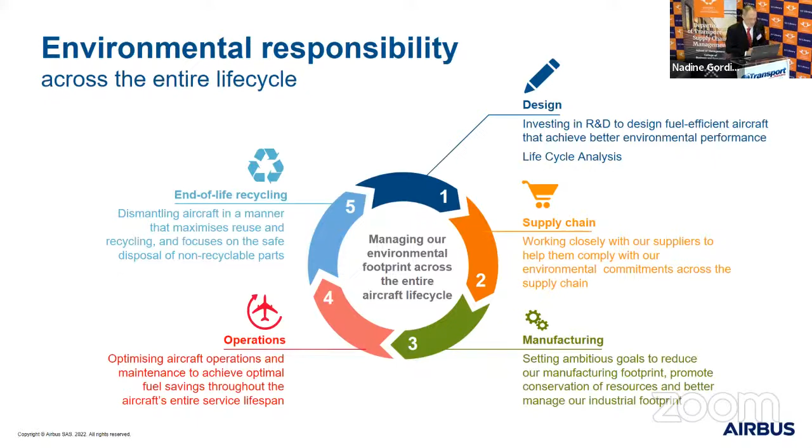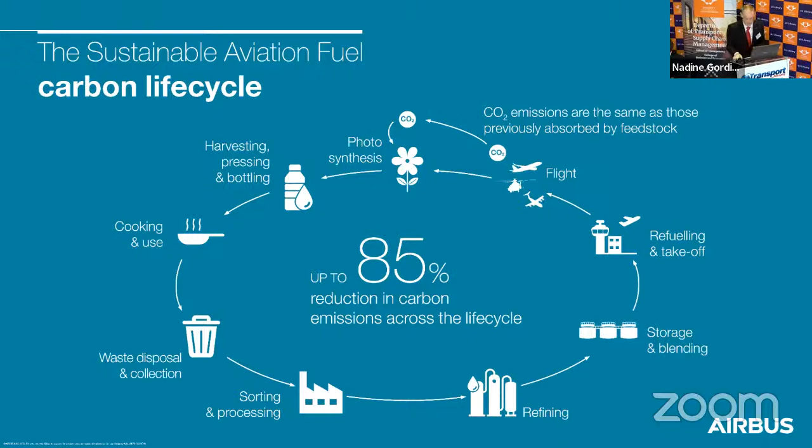There are some major challenges, however, to sustainable aviation fuel. That is essentially the availability - production is very small, much smaller than what the global fleet requires. The cost is currently very high. Of course, those two issues are linked: low production rates, low purchase rates, high costs. And the distribution is very poor - it's available only in a relatively small number of airports around the world.

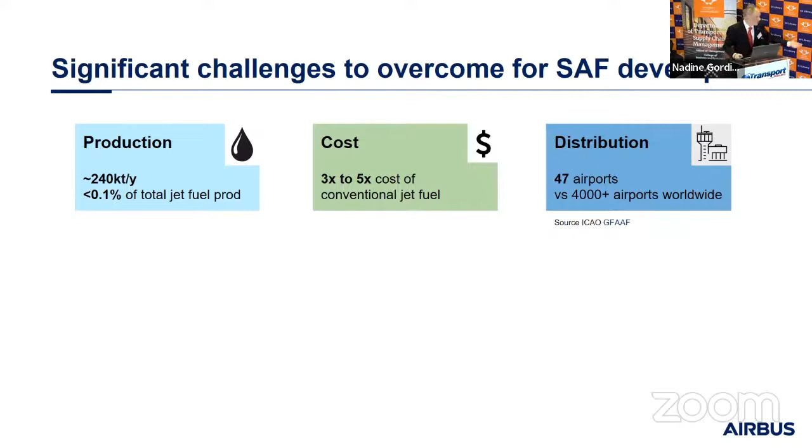So some airlines that are beginning to use sustainable aviation fuel in their operations are actually taking as much as they can from one location, but using none elsewhere in their network, because they might have a target to use 1% sustainable aviation fuel. How can you do that? You uplift sustainable aviation fuel at one part of your network. And a lot needs to be done.

So between now and 2050 - a long time, but $1 to $1.5 trillion will need to be invested in the production of sustainable aviation fuel. Companies that already produce fuels are best placed to do that, but it requires different, specific infrastructure. And policies as well - policies need to be put in place to facilitate this. And that is progressing very fast. There's some good news here as well.

The good news is there's a lot of collaboration with, for example, the Clean Skies for Tomorrow organization, which is a collaboration of engine manufacturers, fuel providers, and airlines working together to develop means of overcoming the hurdles. For example, they produce a very interesting policy toolkit, which you can find online.

Which governments around the world can take on board in support of promoting the scale-up of sustainable aviation fuel production. Many airlines have made announcements. This is just one example: airline alliances committing to having 10% of their fuel burn being sustainable aviation fuel by 2030. It's an ambitious objective, but it's one which the industry is coalescing around.

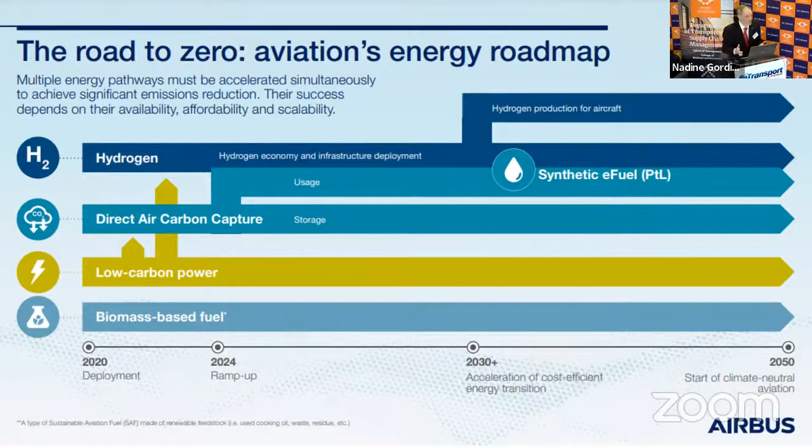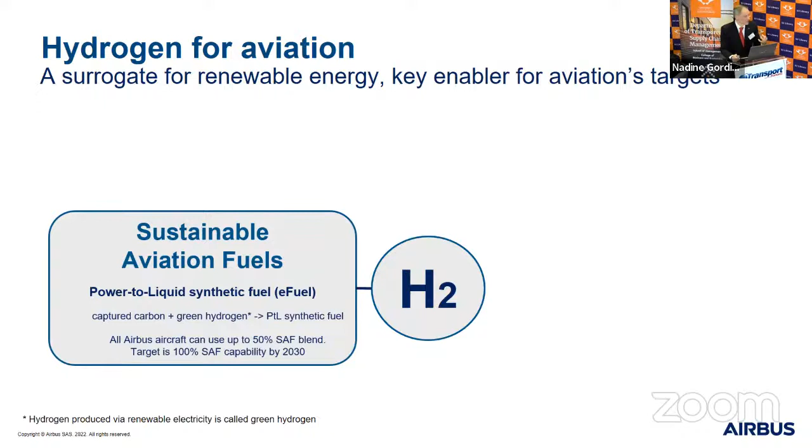To do that, you also need hydrogen as an ingredient, but hydrogen can also be used directly as a fuel, potentially on some new aircraft types, which I'll show you briefly now. As a quick reminder, hydrogen can actually contribute to aircraft propulsion in three ways: through being an ingredient in sustainable aviation fuels, so synthetic kerosene in combination with carbon; by generating electricity through hydrogen fuel cells; and also through simply burning it as we do kerosene.

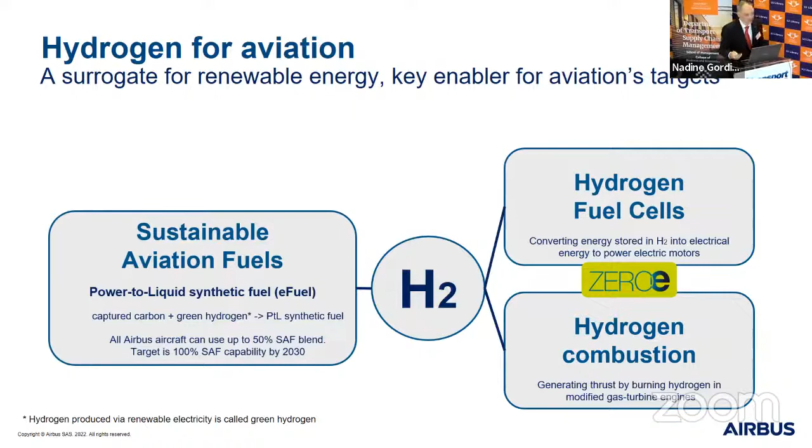So you can burn hydrogen in a gas turbine. The ideal gas turbine would be optimized somewhat differently, but it's not breakthrough technology that's required to burn hydrogen in gas turbines. On the right-hand side of the chart, those two means of using hydrogen are both envisaged for our ZEROe concept aircraft, which are zero-emission aircraft we envisage bringing into service by 2035. It's still quite some way away, but there's a lot of technology that needs to be developed between now and then, along with a hydrogen ecosystem. That's what we're beginning to work on.

So these are concept aircraft. The aircraft we actually launch later in this decade won't be exactly any of these three, but it could look like one of them. You'll notice, compared with our current aircraft that Joep will tell you about, the range capability is relatively small. That's because of the specifics of hydrogen - it's a fuel with good energy density from a weight point of view, so it's very light, but it takes up a lot of volume. So actually carrying that amount of fuel is more of a challenge and would require very specific aircraft design.

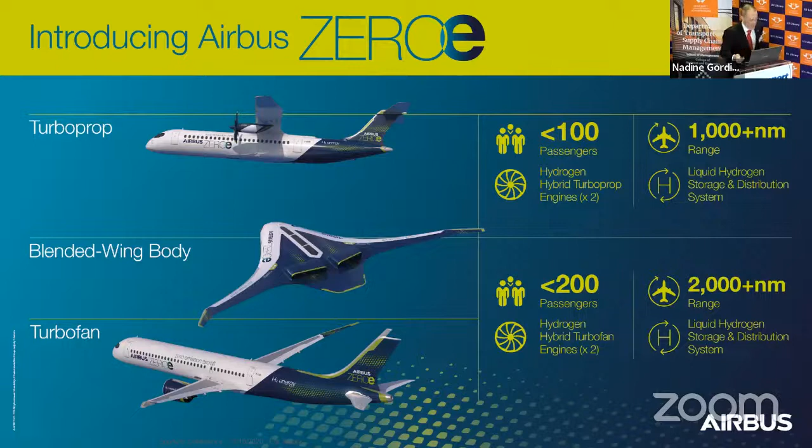Just to give you an idea of some steps along the way, in 2026 we will fly an A380. The A380 is not going to be powered by hydrogen - it has its 4 kerosene-powered engines - but you can see that we're going to mount a smaller hydrogen engine up high on the fuselage to test hydrogen combustion in flight.

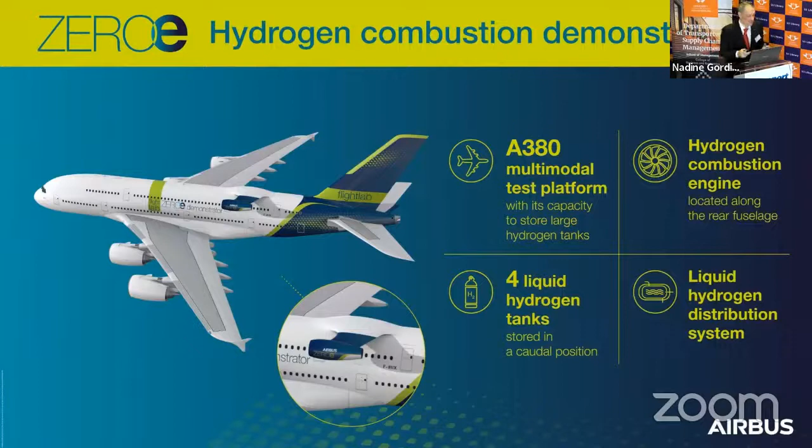And we're not just testing the hydrogen combustion, we're testing the fuel system, because we're going to use liquid hydrogen, which is cryogenic, stored at -253 degrees. The fuel system is therefore cryogenic, so it's a completely new fuel system for us to develop. That's part of the reason why we're going to be needing to fly such test aircraft.

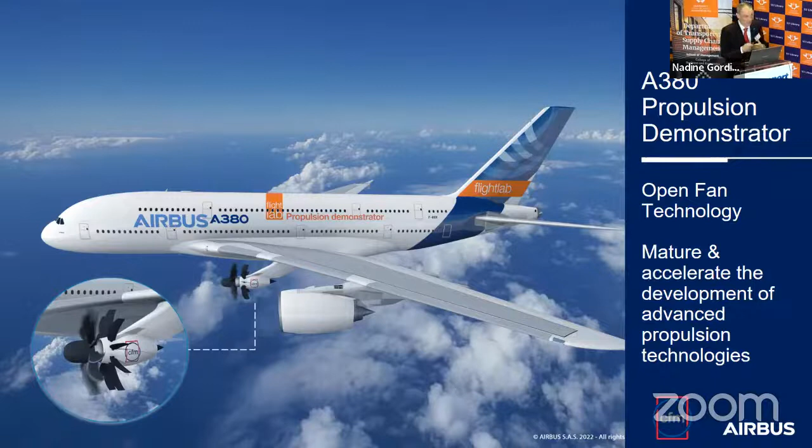We're not exclusively working on hydrogen. We will also use an A380 to test radical new engine technologies, such as this open fan technology, around the same time frame, also for new aircraft configurations that would be powered by kerosene.

We're also testing aerodynamics. I tend to think that aerodynamics has been studied so hard and for so long that we must have done everything there is to do and found the perfect solution, but apparently we haven't. I think this aircraft is going to be constructed in 2023 - it's actually a modified Cessna Citation with completely new wings - and it will fly, I think, in 2024 to test very radical aerodynamics.

And we're developing our industrial capabilities as well, because there's no point having radical new concepts if the industrial system is not capable of delivering them. Essentially, we don't want the industrial system to be a constraint on anything we would like to do with a new wing. And if we think about the hydrogen aircraft, the wings will no longer be storing the fuel as they do today - that would need to be stored in tanks elsewhere. So that gives a whole new range of opportunities that we might want to make sure we are able to realize.

And this is a kind of fun and immediate thing that we're working on. As for this year, this should actually start happening. This aircraft is already flying - it's a glider, a rather unusual one because it has a turbojet mounted on the back. We've actually taken a couple of these gliders and we're going to test hydrogen in this turbine. We're actually going to fly 2 aircraft - one will burn kerosene and one will burn hydrogen.

We'll fly them together. We'll have a chaser aircraft monitoring the exhaust from those aircraft and the properties of those exhaust plumes, which is very important for understanding the benefits that hydrogen could bring with regard to the non-CO2 effects of aviation. That's something I haven't addressed today, but CO2 is the principal effect that we understand, but there are other effects in terms of climate change that aviation has, which we globally call non-CO2.

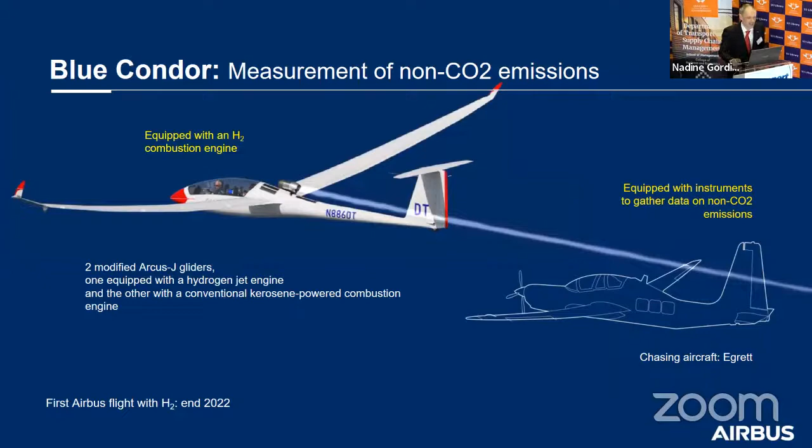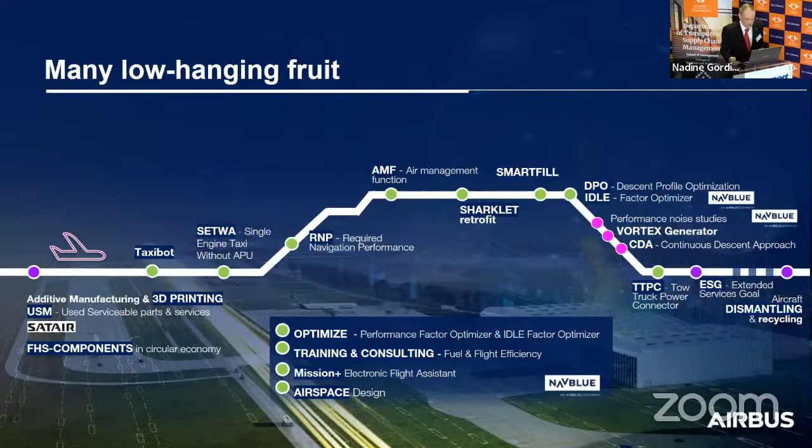So finally, and I'm almost done before handing over to you, operations and infrastructures - there's a lot we can do. This chart is very busy, so I will simply say, in every stage of the flight, and this chart is representing a typical flight, there are things that we can do to improve the sustainability, whether it's noise, waste, or carbon dioxide and greenhouse gases. We can still find some more percent, 5-10% maybe, if we combine all of these things together.

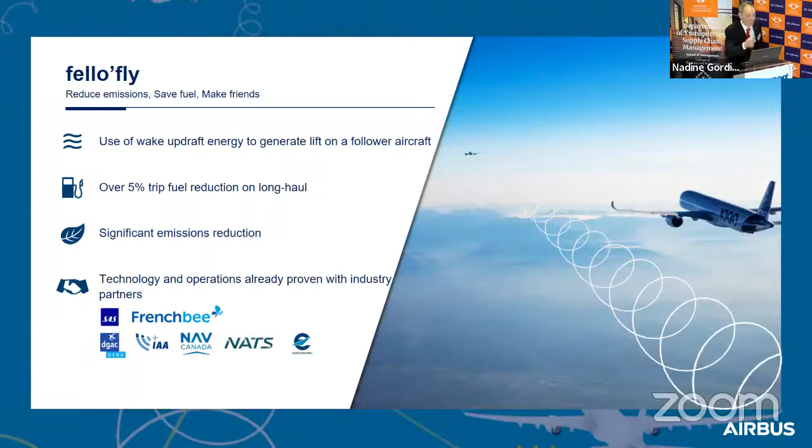Fello'fly - we can fly aircraft one after the other. You've probably seen geese flying - they fly one after the other, and the goose which is in front is doing all of the work, and the goose which is flying just behind and to the side is only doing 75% or something like that, because he's benefiting from the turbulence of the goose in front. We can do the same thing with aircraft. It's a challenge in terms of air traffic control, but it's something we're working on. And again, we can gain some more percent here in terms of our emissions.

And finally, carbon capture. This isn't directly associated with airline operations, but it's a nascent technology capturing carbon dioxide from the air. Airbus has begun to invest in this because for that last segment in that net zero roadmap, that lowest segment, to the extent that we're going to need to rely on offset and carbon removals, we would prefer to do carbon removals than offset. And carbon removals is something that the aviation industry can invest in, and we're beginning to invest in it. We hope we can then demonstrate to regulators that that's something that can genuinely make a contribution and can be recognised by regulators as part of the path to net zero.

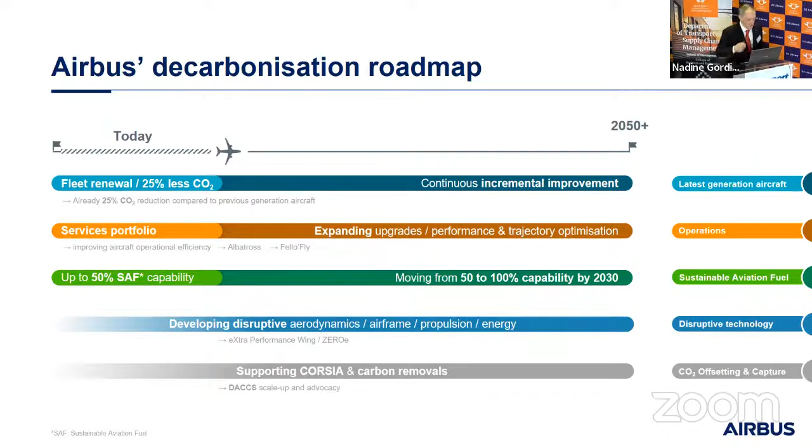Here's a summary chart, which I won't detail because it summarizes what I've said with regard to the top level means that we can address those 5 domains to reach net zero, but we'll leave that with you.

When it comes to talking proactively about what we're doing on sustainability, which is also important, like we're doing today, we have to be very accurate about it and give the right context. If not, we will be accused of greenwashing, and that is counterproductive. So I hope you will have the impression that in presenting what we do today, we're also being transparent about sustainability, acknowledging the impact, as well as trying to tell you about what we're doing to address it.

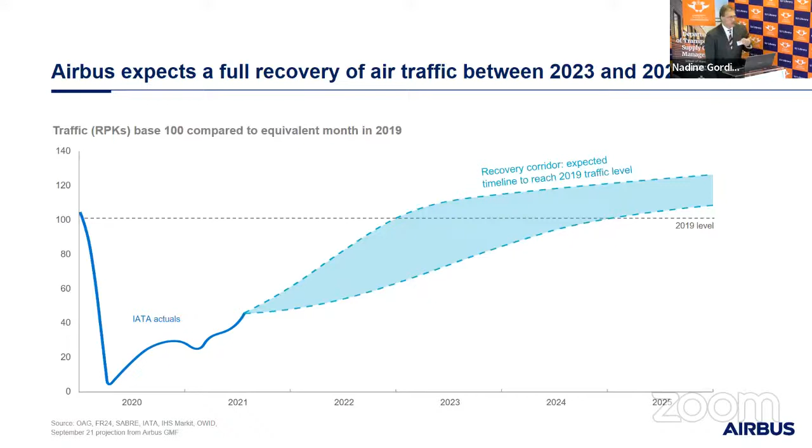We do what we call a global market forecast, an economic forecast that looks 20 years out into the future to analyze what we think will happen to traffic and traffic growth, and then to tell us, especially Jérôme, how many aircraft we'd be expected to sell over the next 20 years. What we see is that within Africa, traffic will grow by 4.6% every year for the next 20 years. Domestic is 4.6, and within the continent, 4.7. Towards Asia Pacific, it's growing even more, 5.4%. But you get the picture: for us, all in all, there's going to be a lot of growth.

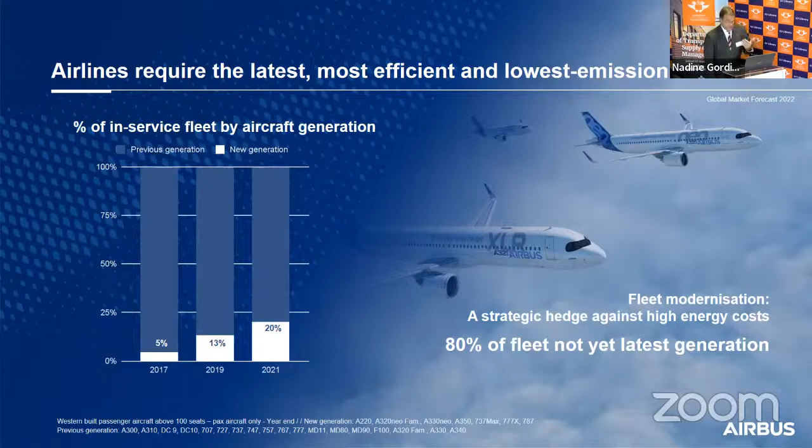The latest generation aircraft - this is the Airbus latest fourth generation aircraft family. We have the 220, the 320, the 330, and the 350 families. All of these, compared to the previous generation, burn 20 to 25% less fuel. Burning less fuel means less emissions, so for us that is the quick win solution: putting the latest possible aircraft into the market.

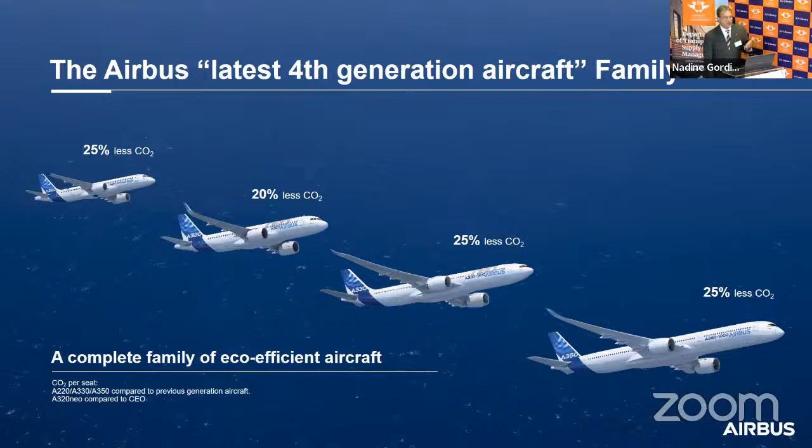So very quickly, the 220 is a brand new aircraft, a clean sheet design. It has all the latest advancements, and I disagree when Corin said we don't know what we can still do with aerodynamics. We're still improving aerodynamics because the computing power we have nowadays allows us to do calculations that wouldn't have been possible 10 years ago. A lot of the aerodynamics is just computer-generated calculations that allow us to totally optimize the aircraft.

We have advanced materials, the latest engines, simple systems, and a very comfortable cabin. Okay, the comfortable cabin isn't part of the sustainability story, but it does make people prefer Airbus - sorry, I had to get that plug in.

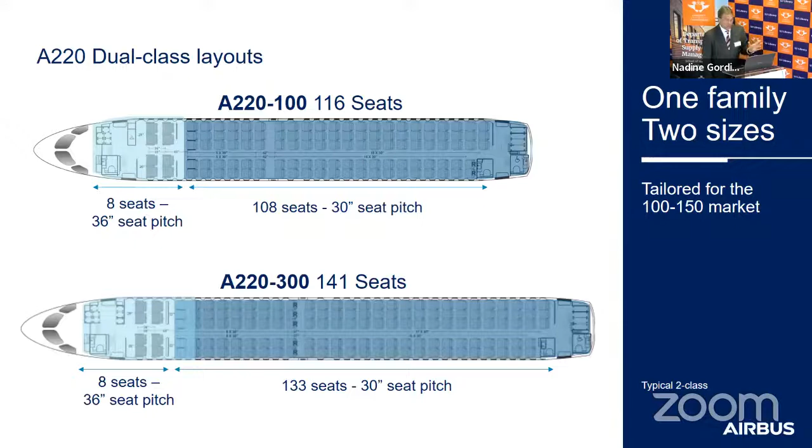Very quickly, the 220-100 has 116 seats in a two-class configuration. The 220-300 has 141 seats, very well suited to the intra-Africa markets. These aircraft can fly up to 7 hours. From Johannesburg, the 220-300 or the 100, with very similar ranges, covers pretty much everywhere you'd want to reach in Africa with a single aisle aircraft - right up to Ouagadougou, to Mauritius, and domestically down to Cape Town.

Now we have the 320 - actually our bestseller, the most successful aircraft family ever. We've sold almost 17,000, and still have over 6,000 to deliver. This was the original CEO we started with, but we improved it over time. Back in 2012, we added sharklets, reducing fuel burn by 4%. Then in 2015, we introduced the Neo, improving fuel burn by 15% with new engines. Now we've enhanced it further by working on the cabin to allow more passengers on board, so on a per passenger basis we're 20% less fuel burn compared to the CEO.

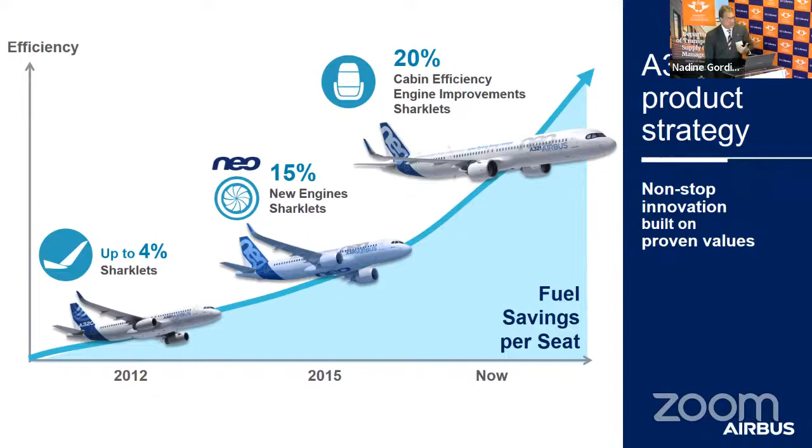At the same comfort standard, yeah, the same very high comfort standards. Sorry, otherwise I get rapped on the knuckles by Jean. Now I'm trying to not get rapped on the knuckles by Harry.

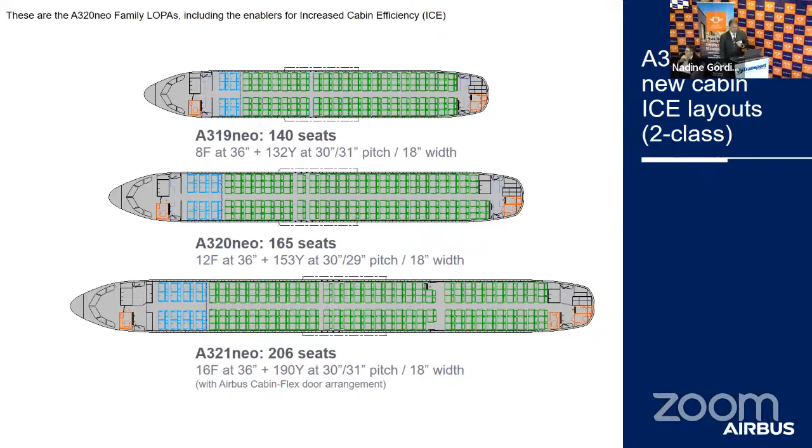So 140 seats on the 319, 165 on the 320, and 206 on the 321 Neo. Very much similar ranges to what I showed you earlier. So again, it covers from Joburg, covers all of Africa, or all the single aisle destinations, up to Ouaga, up to Mauritius, very similar. It's just what we say with Airbus is just tell us what size of aircraft you want and we'll make it work for you, because they are totally interchangeable across all the destinations.

Now something new, this is the 321 XLR. This is something different because it's an aircraft that's been built to fly long-range, wide-body routes, but at single-aisle economics. So in essence, it has more range than the basic aircraft, better cost per seat, and it's low risk for certain routes where you wouldn't want to put a 330 or a 350 or a 380. You could put this much smaller aircraft to open the route.

Oh, thank you. Actually, I'm almost done. Thank you. And just as an example, what could you do?

So this time I'm showing it from Cape Town because remember I said that Johannesburg is hot and high and it's a difficult airport. But if we take it from Cape Town with the 321 with 172 passengers, you're going to be flying 9 hours into Brazil, as far as Cairo and as far as Dakar as well. It's just to give you an idea of what we can do with these latest generation aircraft.

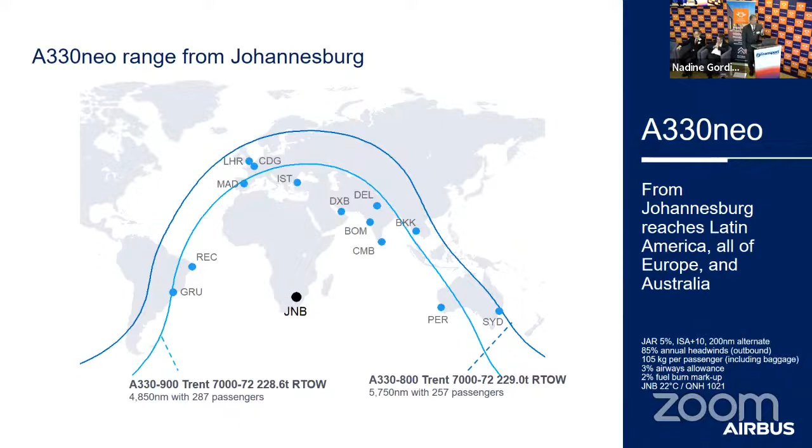And then our last product that I'm going to discuss is the 350, and my tagline here is the most efficient large wide body. When we started the 350, it was like with the A220, we started with a clean sheet design. We started from scratch and said, right, what can we do? What do we need?

Because of that, again, 25% lower fuel cost compared to, let's be frank, our own 340 at the time and the 777. We worked on the reliability of the aircraft. It's the flexibility - this aircraft can fly short routes, it can fly long routes. And of course, we did a lot of work on the cabin interior as well to make it as comfortable as possible.

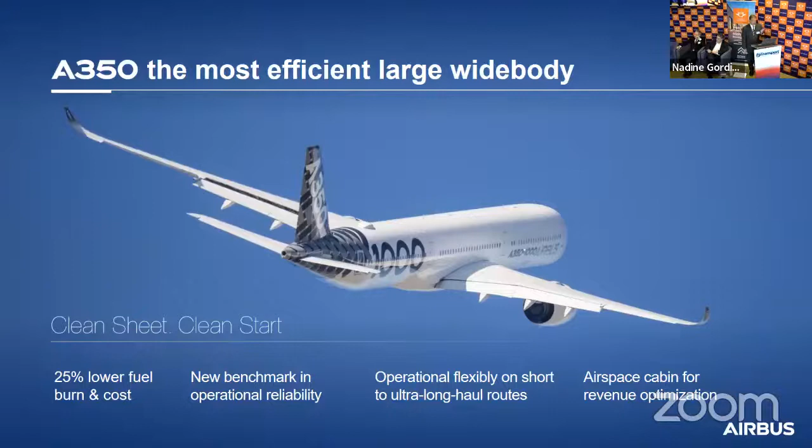So this aircraft can fly from Johannesburg. It's flying just over 13 hours non-stop, reaching most of Latin America, reaching all of Europe, and reaching all of Australia. But then some of you will say, but on your map, you're not showing New York. But we all know that SAA flew the 350 to New York. What I'm showing you here is just a very conservative range circle and description of our aircraft. When we look into actual operations and look at specific routes, we find that we can actually fly much further. And SAA, when they did have the 350, they were very happy with their operation to New York using that aircraft.

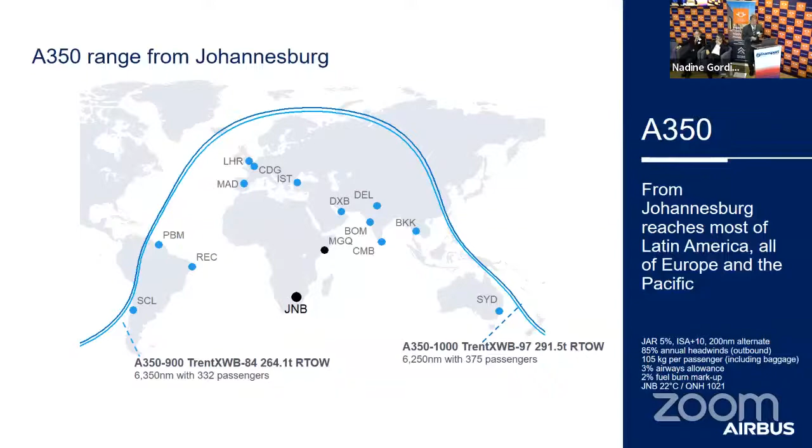I think we'll all agree that air transport is important to Africa. What I haven't put in here, but I'm going to say it anyway, is that please be aware that Africa is important to Airbus. Myself, I only look after the continent, Jerome only looks after the continent, and we're very, very happy to be here and have this opportunity, not just to give a product plug, but also to discuss with you and network.